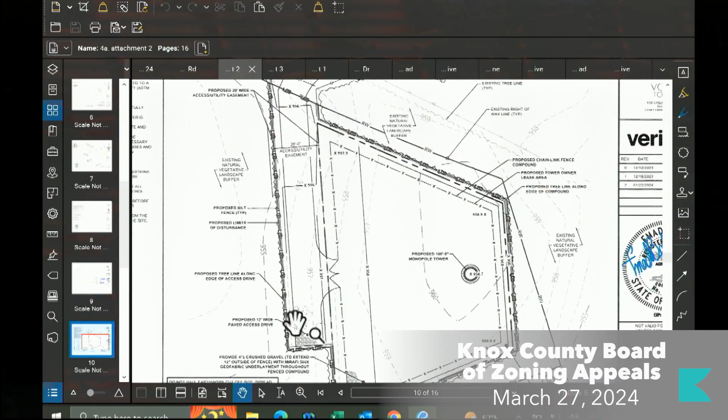There's the next page, it's more of a zoom in. So right up here where you see the right-of-way at the top right corner, other corner here of the compound area, it's almost up, the lease area is almost touching the right-of-way. It's possible along that north side to meet a 12-foot landscaping buffer, but right where you get to the edge and that right-of-way turns towards that tunnel, we're abutting up to it completely.

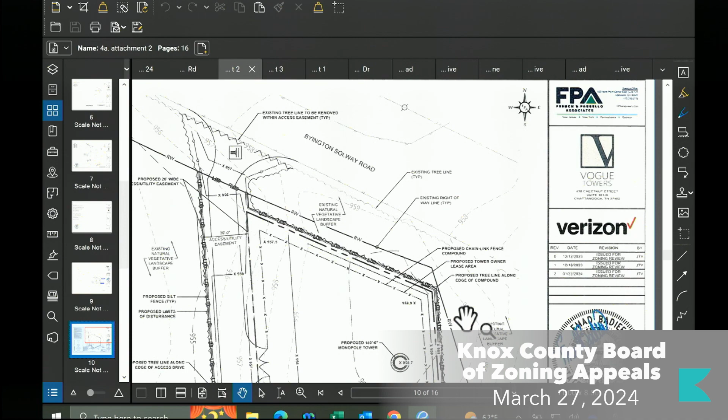I think some of the confusion we had upstairs is the right-of-way on KGIS doesn't match the right-of-way from the plat. So this is the actual right-of-way from the plat. The right-of-way shown on KGIS is showing it to the center line of the road, so that's a mapping error on KGIS. Out there to the east? Yes, that's correct, down to the east road. See, on that map, the right-of-way line showing being all the way to the center of the road, and according to the plat he's provided, that's not correct. Or the survey, I'm sorry.

Sherry, you have a question? I do. I understand the landscaping buffer, let's talk about the fencing. Is that the same issue you're having with the fencing? Correct. I noticed on page C1 of the overall site plan, there's an area where it talks about a reduced fall zone. Can you explain that to me, please?

Yes, ma'am. So the tower is a monopole structure, the round tubular type tower you see, like a lot of utility poles. The reduced fall zone is - this is designed, it's 180 feet tall, but it's designed with essentially a failure point in the event of anything catastrophic, similar to like a golf club shaft or an umbrella that gets a kink in it and bends. So this is designed with what they refer to in the engineering side as a reduced fall zone, meaning it'll be designed at a certain point to essentially fail there in that catastrophic event, and so the top part will just go over onto the bottom. So essentially the bottom is over-designed and the foundation is over-designed.

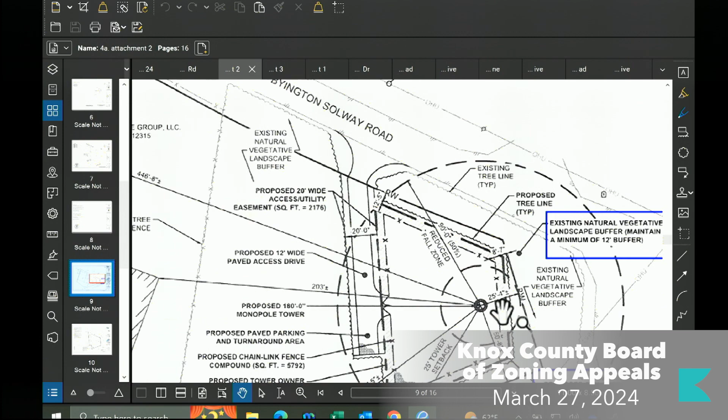But if it was an option to install additional evergreen trees along that right-of-way and along the east strip that does go out at an angle, it does increase as you go south there. I'm sure that could be something that can be done, yes.

When you say south, you're talking about towards the right where the railroad is? I don't know if y'all see that, but right there, as you get closer to that tunnel. That's not the south, that's the east side.

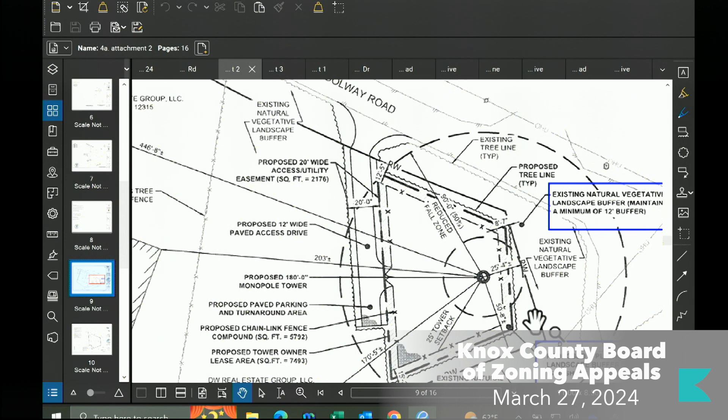Well, heading south from the northeast corner, it's only 8 feet 7 inches. As you head south, the right-of-way line goes away from the site, so it does increase there.

Right, okay. And on the south side, that's the side along the railroad, there's plenty of room for an additional buffer, you agree? I agree there, but it's a 100-foot railroad right-of-way. From an aesthetic point of view, it's not gaining much.

I'm reasonably sure that the ordinance doesn't say to meet aesthetic requirements, it's a requirement for a 12-foot buffer, period. Okay, that could certainly be done.

It looks like there's 15 feet along that southern line, so yes, there it would be able to meet it.

And you can get what you can get on the north side. Right, we're still in that top corner though, just roughly 8.5 feet. We're still in the same position, that we don't have enough space to operate within to meet that.

A variance for the landscape buffer in that one corner would be much less troublesome than the entire site, in my mind.

But again, there is nothing in the criteria for a variance that we've met.

Unless you're telling us that if we deny this, you just can't use this site. I don't know that this site is feasible. I mean, the way it is right now, to come in 12 feet, you practically eliminate the site.

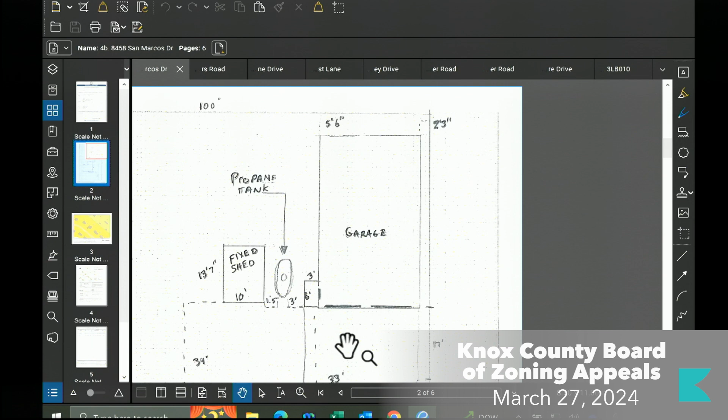Being in the county, building a garage, the codes and things like that, I was novice from that standpoint, not knowing all the ins and outs of everything. Because my parents owned the lot behind me, and they lived beside me, they had no issue with where the garage was built.

Aesthetically, I have current pictures of what it looks like now. But I couldn't, the lines, the topography goes down. There's some issues there. I had to get it close to the back line, and from my standpoint, needed it to be a certain size.

Width-wise, there is a propane tank, then that fixed shed. I said it was fixed because when I bought it, it was already there. It is on a concrete foundation. It could not be moved.

There's also a tree right behind the propane tank, and it's a stump now. Getting rid of that stump would have been a major cost for me. I was paying cash as we went, not taking out a loan for this. The foundation sat for a while before I had the money to build the garage.

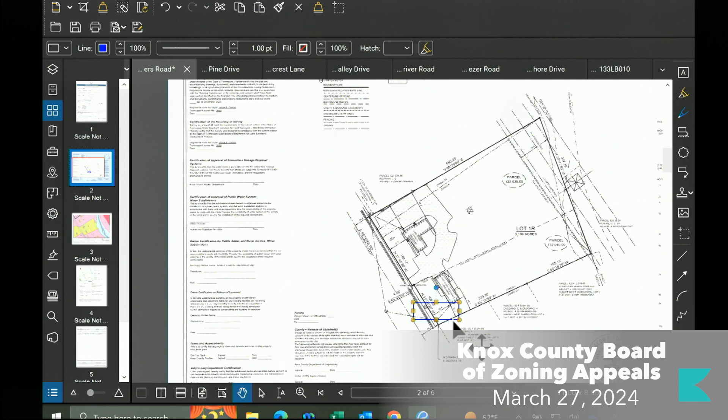We had a surveyor do a replat for us to get these two properties re-subdivided into one, and that is almost complete. We're waiting on, I believe, the Board of Health to sign off, but all the others have approved the re-subdivision.

Any questions or comments from the board? Any statements from codes? None at this time. Has there been any talks with the neighbors? Is there a problem with any of the neighbors? There's no known issues. We've gotten to know several people there.

Most of the properties along the road right there are residences that have become commercial properties. The title company next door did the closing for us, for example. There's an insurance company a couple houses down. The next door neighbor on that side, I've not met the owner, but there's a gentleman renting and living there who has no issue.

Did I understand you to say that the survey you had done was to combine lot 39 and 40 into one lot? Yes, 268 and 272 would be combined.

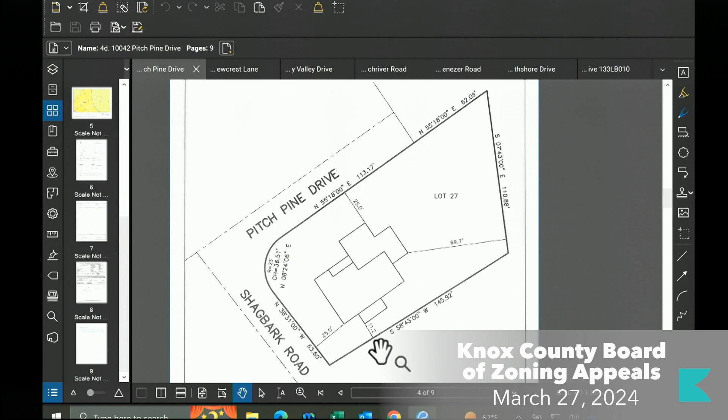Codes. Is this deck going to be covered? Say that again? Is the deck going to be covered? It's gonna be open deck. I haven't decided yet. I'd like it to be covered, but if that's not an option, then we can improvise.

It does make a difference, I think. Actually, I think you're thinking about if it's enclosed or not. Regardless of whether or not it's covered, if it's an open projection, it can go up to 10 feet into the setback. So it can be covered, just not enclosed.

Correct, it has to be a first-story projection though, right? Is that deck on the first or second story of the house? I'm sorry, say that again?

Is that deck going to be on the first or the second story of the house? It's a one-story house, so it would be on the ground. Right, okay, so that would qualify. Yes, it sounds like the deck is not an issue as far as setback is concerned. Yeah, it would be allowed to project.

Sherry, go ahead. I'd like to make a motion that we approve the waiver of the front yard setback from 35 feet to 25 feet along Pitch Pine Drive due to the steep topography, odd shape of the yard, and where the septic system needs to go, along with the reserve.

Second. Motion's been made and seconded. All those in favor say aye. Aye. Any opposition say no. Motion carries. Thank you.

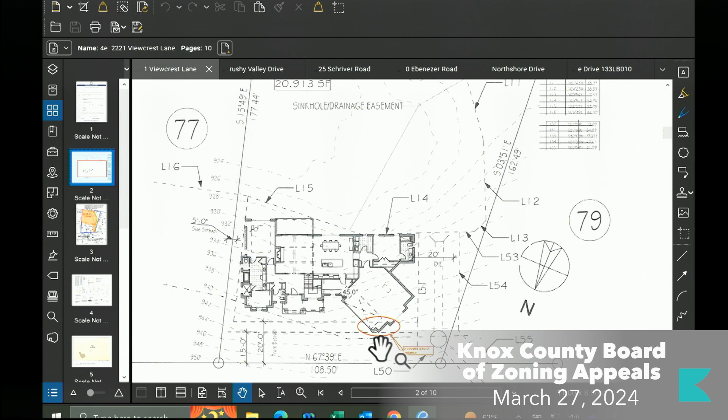And all that's narrowing my depth of which I can build the house. If you go back to the attachment showing the house on the property, I have an angled garage, and I'm wanting that one corner to encroach into the 20-foot setback by 6 feet.

Any discussion? So the front yard setback is going to 14 feet only at that corner of the garage? Yes, ma'am. Okay. Any information from codes?

Only that at the rear of this property is a sinkhole, and it looks like he is building entirely in the sinkhole buffer. As you can see on this map here, L13, L14, and L15 are the rim of the sinkhole, so by ordinance he wouldn't be allowed to go below that line. So I do feel as though he's using all of the property that he has. He can't back up any further.

Very well. Any other comments from the board? Questions? I'd like to make a motion.

I'd like to approve the waiver of the front yard setback from 20 feet to 14 feet for the new construction of a garage, because not only of the topography and the drainage easements for the sinkhole, but also this allows the owner the best use of the property.

Second. Motion's been made and seconded. All those in favor say aye. Aye. Any opposition? Motion carries. Thank you very much.

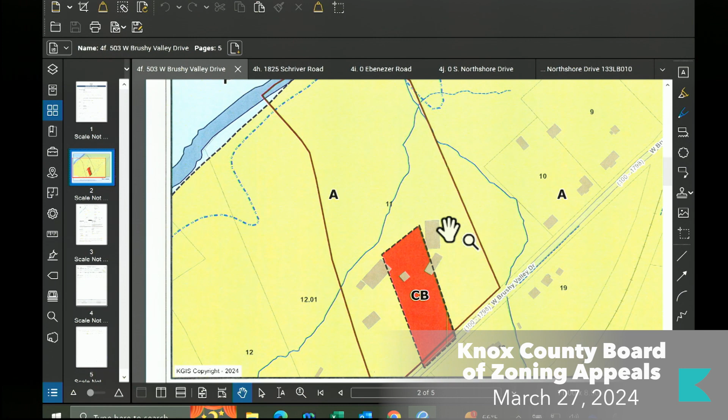Did Mr. Hall build that other building then? I assume so - I think it was built sometime between 85 and 95 or 96. So it was after the rezoning, which was in 88. Yeah, it says in the rezoning report that Mr. Hall was under NOV for construction of a building without a permit.

So it has incorrect mapping, but the wrong way. Correct. So the CB zone where it is right now should include that building at the top - no, at the left, it should have gone over that way. But my concern is more what I heard - that the CB zone was only to be permitted for the construction of trailers, and if trailer construction ever went away, would the zoning go away? Can that be done? That cannot be done. I didn't think so.

What potentially could be done is conditional zoning. It sounds to me as if the county commission agreed to rezone that property conditioned on the limitation that only the trailer business would be allowed, and once the trailer business went out, no other commercial business would be allowed in that zone. But you can't automatically unzone because that's a legislative act. As far as the covenants go, those are private agreements between the property owners - if there was a commercial business on this property, they could bring suit for injunctive action to stop it.

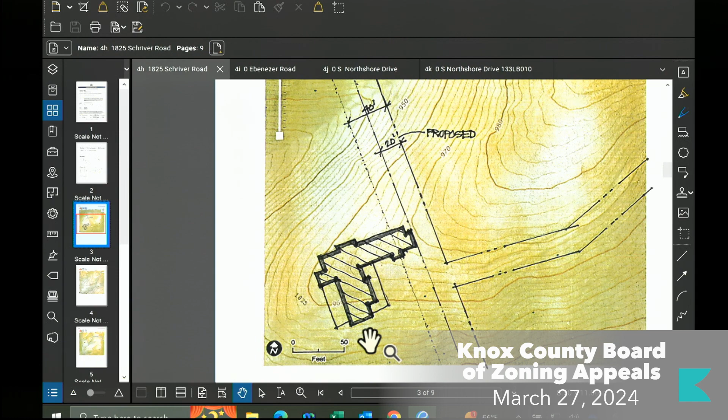So the further down you go, you would probably have to deal with something on the drain field, depending on what the invert is, and the finished floor elevations—you might be into a little bit more money in the drain field too. And then there's right where that is and all the way around, really below, what is that, the 890 contour? Or no, which one is that? Right, the one that goes through the house and wraps around right there.

Below that, you're into more vegetation. You can see that's, other than the area where that knoll is behind that one contour where the arrow is right now, the rest of the lot is all heavily wooded on all sides, as well as the lots contiguous with the perimeter of this lot.

Any questions from the board? Or, I'm sorry, any statements from codes? No, we don't have any. Any questions from the board?

I'll just go ahead and say the site is obviously steep. It's not the worst configuration of a house for this site, but it's pretty close—though that's not our problem. The proposed use is not excluded in this zone. The variance is the minimum adjustment necessary for reasonable use of the property. The variance is in harmony with the general purposes and intent of this ordinance and doesn't injure a third party. It's not contrary to the public interest, and granting of the variance is in keeping with the spirit of the ordinance. So for those reasons, I will make a motion that this be approved.

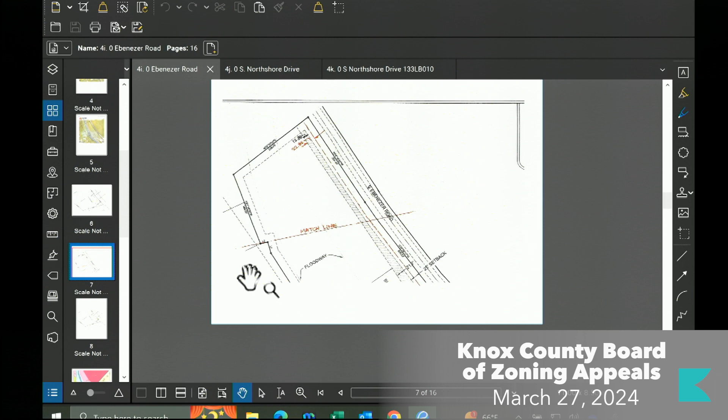Couple things, couple clarifications. Your application says there's a 250-foot wide TVA easement? That's what I have on a survey done by Richard LeMay that shows on here. That I don't know - the one at the top shows 75 feet and shows TVA. There are transmission towers; they're not shown on there. The base of them isn't shown, but there are transmission towers approximately in the center of that TVA easement at the top.

But if it's a 250-foot wide easement? Well, you can see the other - I guess I don't know who else got utilities. The math doesn't add up. If it's a 250-foot easement? No, it's a 75 that overlaps a 250, I believe. Yeah, it does look like there's several transmission lines there. But we can't go below that top 75 line anyway, so it doesn't really matter. And then when you get into the flood zone, then you get into the creek.

Okay, on the same map by LeMay - yes, sir - it shows the face of the buildings right at the 25-foot setback. Is that correct, the building area? That was before - we were asking for the variance, because we're so narrow on the other end.

I'm not sure if you pulled that drawing up, I'll tell you. Those are at 25, that is correct. Okay, so if they meet the 25-foot setback, why do you need a variance?

The topo is unbelievable in there. It drops about 15 feet across 30 feet. So you're wanting to move it closer to the road than 25? Yes, it's a front yard.

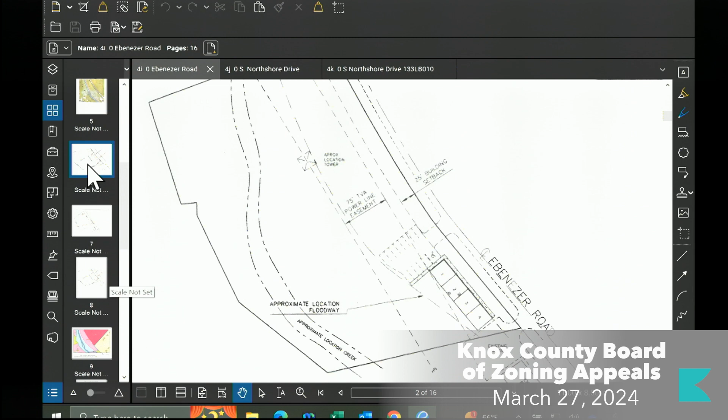At the time, I hadn't, and I still don't completely know, but what we need is flexibility to be able to manipulate the building in that area.

Well, you understand one of the criteria for an application to this board is a drawing to scale showing what you want to build, where you want to build it, and all of the dimensions that are critical to the decision. Right now, we don't have that.

We've got a drawing that shows 4 buildings built right along a 25-foot setback. And from that, it doesn't look like you need a variance. Well, they're all less, they're 30 at some point, but they're...

Let's see. I'm not talking about the width of the property, I'm talking about the face of the buildings. Yeah, the buildings are 30 feet at one point, but it goes up to 28. Can you zoom in on the LeMay and Associates?

Zoom in on that right there. Keep going. What's the building going to be? You have to have a justification for where you're going to put it. Not what the top of the map shows.

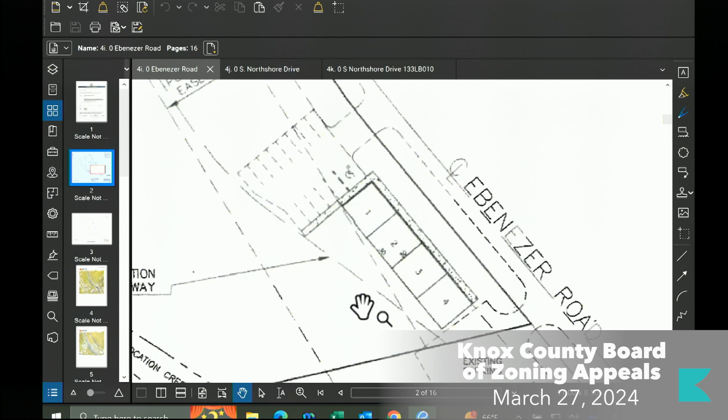Can you move up a little bit? Yeah, there you go, right there. It shows the 25-foot setback, and right where his hand is, it shows the building faces being right on the 25-foot setback. That tells me, as an engineer, that you don't need a variance to meet the setback because the buildings are on the setback line.

Exactly, at 30 feet, but on a 2-to-1 slope, and then you've got a cross slope going in more than one direction. You can't do that parking lot. Whoever did that, you can't grade that parking lot because you'd have to grade into the flood zone.

Also, you've got restrictions on what you can do on your handicap space, you can't do a 10% grade. You could if you had room, but we don't have enough room to do that, and it's got to be the most accessible space in the parking lot to the building.

That's going to somewhat dictate what you do with your building. If we can go closer to Ebenezer, it'll help us be able to configure that without having to negotiate so much slope in that area.

Are you saying it's... but that's not the point of what we're here. It's really not the point. The point is, you've given us a map that shows it can be built within the setback limit. If that map is not correct, it shouldn't be in this package.

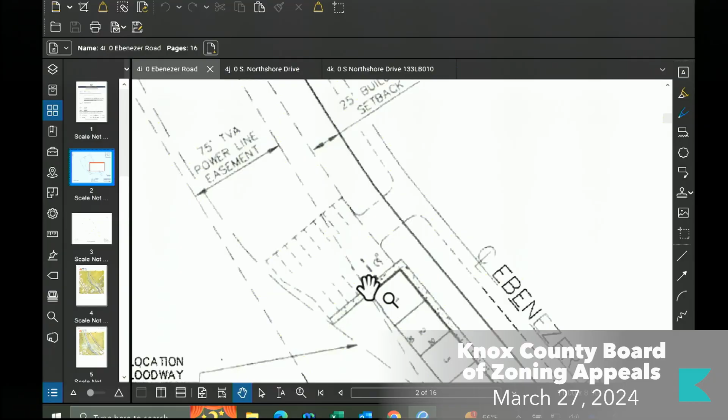I'm sorry, I don't understand, Mr. Huff. Tell me again, I mean, we don't have to have a drawing of what's going to be built, we just need to know where. No, I'm sorry, but the criteria for submissions of plans for the BZA review include drawings to scale showing the proposed construction. It's in the book.

Okay, and if this is not what you want to build, it's misleading at best. I'll show you what it looks like.

I'm ready to make a motion unless you'd like to come back at a later date and show us what you really want to build. I'll leave that up to you.

Let me ask you this, can I show you this? No, sir, I need it to be to scale, showing exactly what you want to build. Okay, I'll come back at a later date.

So are you requesting a deferral of 60 or 90 days? 30 days? Yes. I'd like to have it longer than 30. I think it'd be nice if we had the traffic study too.

That's not an issue, I understand. It'd be nice though if we had it.

I'll make a motion to approve the deferral of this item for 30 days. Second. Motion's been made and seconded. Any opposition? All those in favor, please say aye. Aye. All those opposed, no. Motion carries. It'll be deferred until the next monthly meeting.

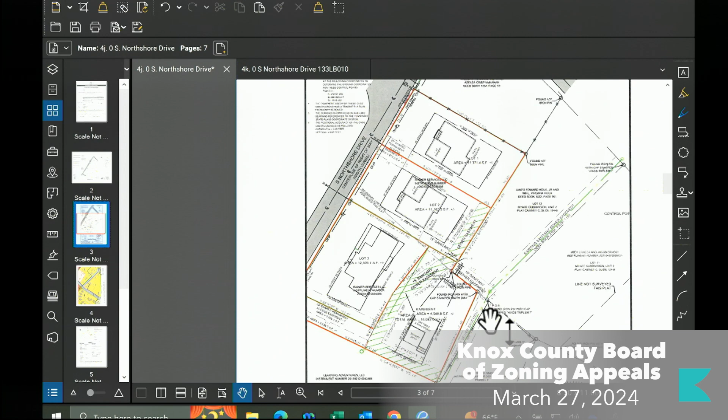Granting this variance, it's the minimum reduction necessary. We're asking for a reduction from the minimum of 75 feet on one of the lots to 73.5 feet, so 1.5 feet, and then from 75 feet to 72.85 feet for the other lot. So very, very minor reduction.

Again, believe that there are grounds to support the variance: steepness, seating and situating of the parcels of the residences thereon. No substantial injustice will be done. Will not be against public interest. Isn't in conflict necessarily with the zoning ordinance, and find that granting the variance would be appropriate for the property, for the grounds and reasons I've set forth here today. Thank you.

Is there any opposition to this? I forgot to ask that question earlier. Okay, Coach, do you have any? No, we don't have anything for you.

Any question from the board? I feel like I'm the only one to ask questions now. This map that has draft in red by Adam Schming Land Survey, does this represent what you're wanting to build?